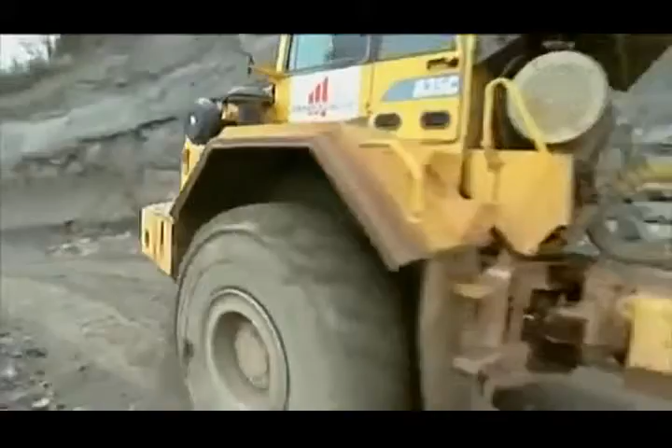The team attempting to build this amazing freeway in the sky had to survive landslides, fight winds gusting at 130 kilometers an hour, and weather massive storms as the bridge simply hung in the balance. It's a bridge that pushes the boundaries of engineering to the limits, and then beyond.

Imagine building a series of Eiffel Towers, then slinging a 4-lane highway between them, all the way across one of the deepest valleys in France. Impossible though it sounds, that pretty much describes the building of the Millau Viaduct.

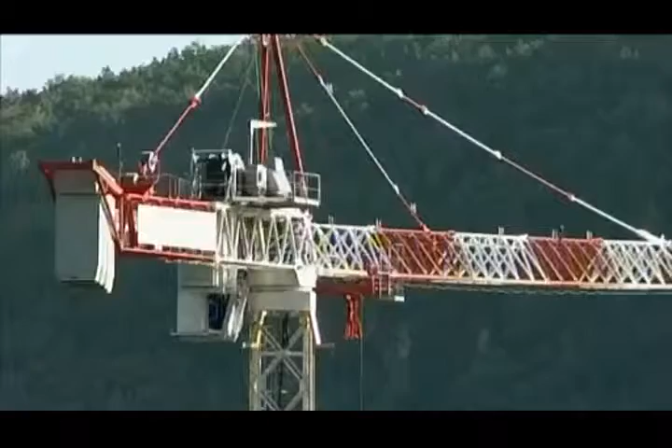From the start, the construction team faced 3 daunting challenges. 1. Build the tallest bridge piers in the world. 2. Put a 36,000-ton freeway on top of them. And 3. Erect 7 steel pylons, each weighing 700 tons.

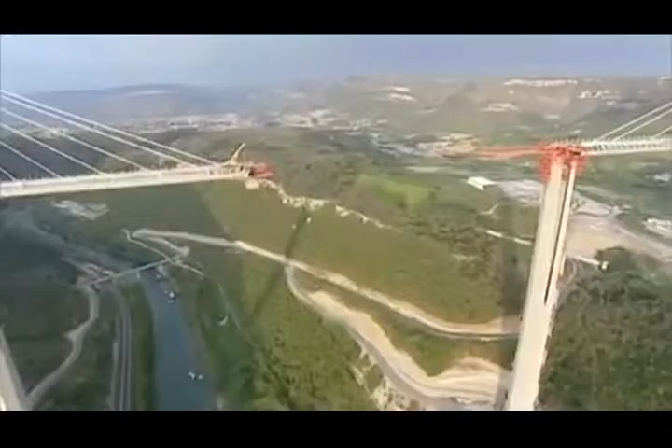And what's more, they had to do this hundreds of meters above solid ground. So high that if you're on the 86th floor observatory of the Empire State Building, you'd still be looking up at this amazing bridge.

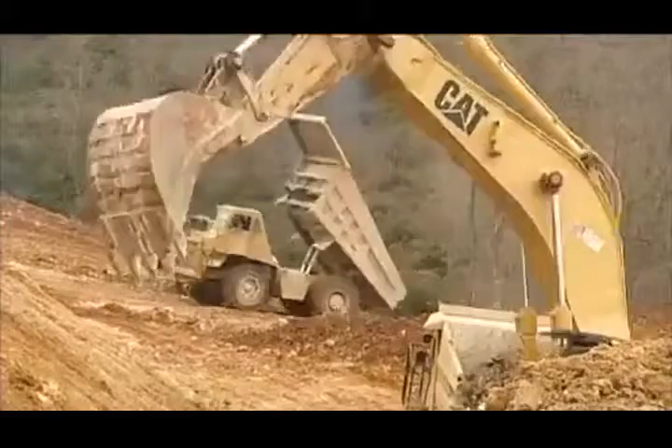October 2001, the team break ground. They're required to build a bridge that will last for 120 years. And to win the contract, the teams promised to build it in record time, less than 4 years. To up the ante, any delay will cost them $30,000 a day in penalties.

There are 7 piers that are numbered from the northern end of the valley. Number 1 will pose problems because of the steep slope. Number 2 will be the biggest challenge since it's the tallest. Crossing the river, number 3 is not much shorter. Then 4, 5, 6 and 7 find the gentler slope to the south.

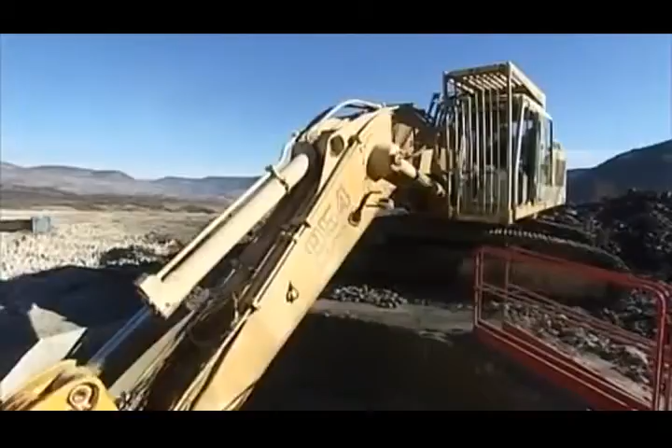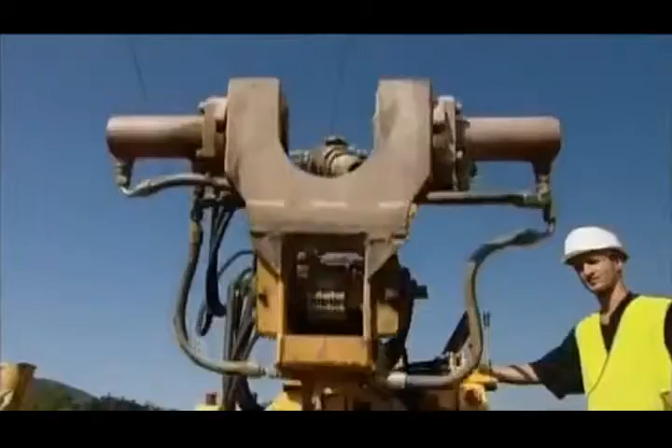To begin, the team had to bury the foundations deep in the bedrock in order to support the enormous weight the bridge will place on them. But the forces of nature were stacked against them. Geologists have warned of the risks posed by the region's fractured limestone. The rock is full of cavities, cavities that are essential to the local cheese economy.

These cave systems, close to Millau, are home to a unique bacteria responsible for the blue mold in the world-famous Roquefort cheese. But what's perfect for cheese could be disastrous for a megastructure. The geologist's diagnosis spelt one thing: landslides. This kind of catastrophe could jeopardize the entire project. Despite the warnings, building went ahead as planned.

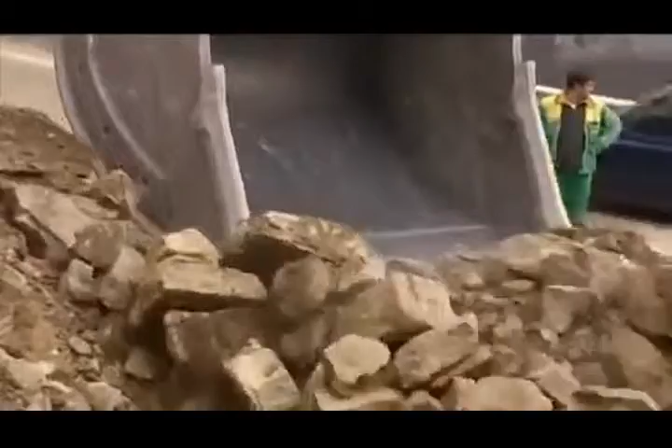Then, well into construction, as predicted, a dramatic storm causes a landslide. 4,000 cubic meters of rock collapse around Pier 1. Fortunately, the fallen rock doesn't damage the pier, but the warning is clear. They're forced to divert precious manpower and equipment to stabilize the slope and prevent a repeat collapse.

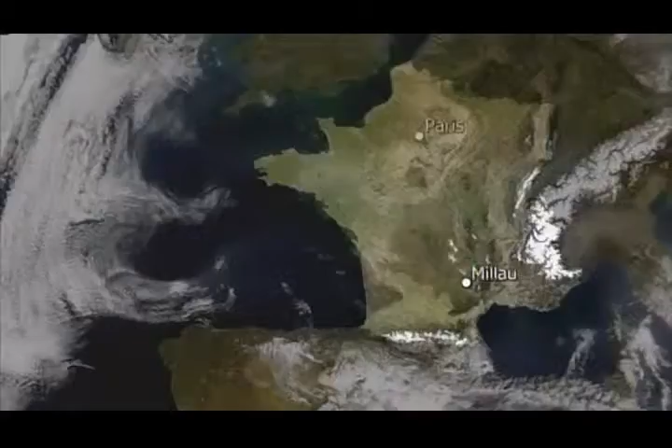So if the area is prone to landslides, why did they build the world's tallest bridge here in the first place? The answer is simple. In the 1980s, France built a freeway linking Paris directly with Spain. This major artery headed south across the French countryside, while from the Mediterranean, the freeway headed north, until they both hit one of the deepest valleys in France and stopped dead.

Welcome to Millau, France's least favorite bottleneck. The town of Millau is in the mountainous region of the Massif Central, one of the most tranquil parts of France. But in summer, this poor medieval town suffered traffic hell. The locals couldn't take it anymore. Neither could their mayor.

It was terrible for our reputation. When you hear every day on the television and radio, avoid Millau, there's a traffic backup, a 5-hour wait in Millau. It's clear the bridge was needed. But it took the French government a very long time to get round to building it.

12 years before construction began, up in Paris, the Ministry of Transport first came up with a plan. Their head bridge builder, Michel Virlogeux, is no ordinary engineer. He's a man who thinks big, very big. Like the Normandy Bridge in northern France, the longest cable-stayed span in the world. With this record-breaking structure completed, Virlogeux was on to his next, Millau.

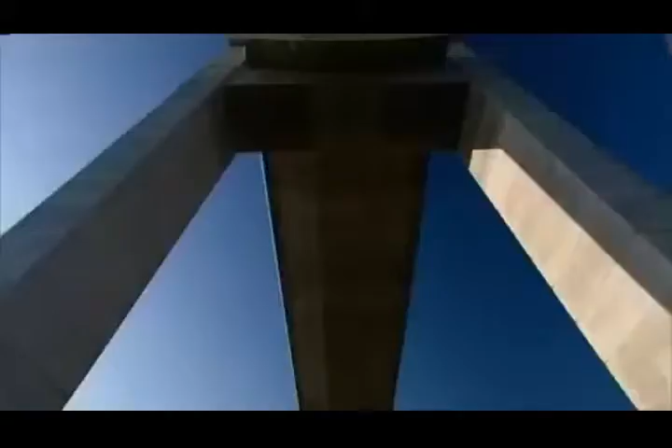His plan, another cable-stayed bridge, but pushing the technology beyond anything previously attempted, with piers 4 times higher than the Normandy Bridge.

France's Millau Bridge would not only be the world's tallest, it would be unlike any bridge ever constructed. When I first showed the drawing of this bridge to the authorities, they really thought I was crazy. Virlogeux's Normandy Bridge has 2 sets of cables supporting the deck. But he wanted to up the stakes for Millau by losing 1 row of cables, so the remaining line would be forced to do twice the work.

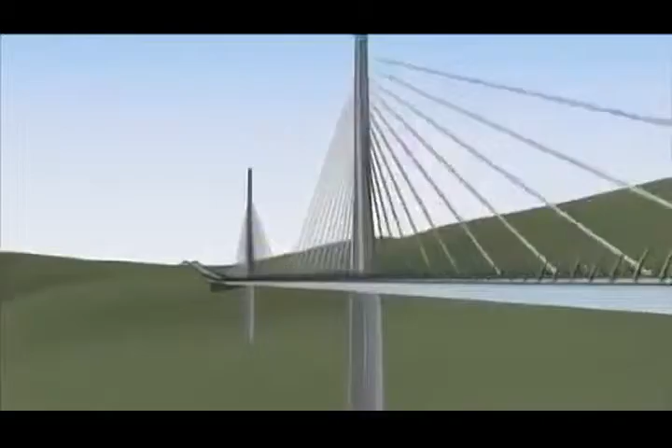More dramatically, the 2.5-kilometer Millau Bridge, instead of having a single main span, needed a whole series of piers to support it across the valley. No one had ever attempted a multiple-span, single-line cable-stay bridge on this scale before.

The French authorities had a problem. Nervous about Virlogeux's groundbreaking scheme, they held a competition inviting other engineers and architects to compete with different designs. The winner, Lord Norman Foster, is one of the world's superstar architects. In Hong Kong, he built the world's largest airport terminal. In Barcelona, offices literally hang from a mast on his communications tower. This is a man who regularly contemplates the impossible and delivers.

You know, it's the challenges. And it's one challenge on top of another, on top of another. And with Millau, one of the biggest challenges was making it fit into the landscape, given it's just down the road from the famous Gorges du Tarn, France's equivalent of the Grand Canyon. How do you make something which has to be so immensely strong against the forces of nature look very gentle, very delicate? How do you weave something on that scale into the most unbelievable landscape?

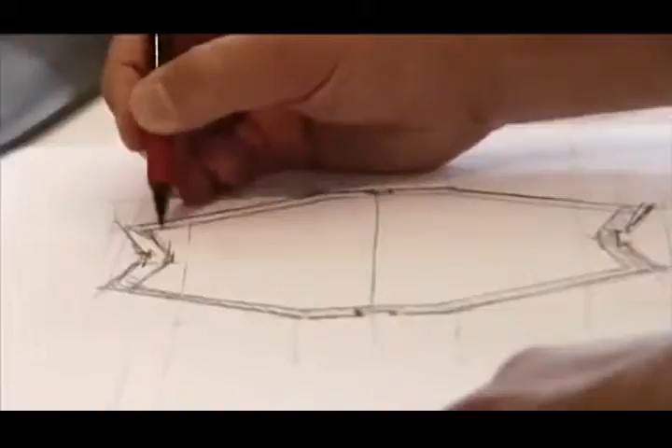Ironically, Foster's answer was to take Virlogeux's pioneering scheme, then push it 1 stage further. He turned an elegant piece of engineering into a delicate work of art by boldly cutting out 2 of the 9 original piers and seriously slimming down the remaining piers and road deck. Foster wanted the bridge to appear as delicate as a butterfly. But this butterfly has to support the weight of 5 Eiffel Towers in gale-force winds hundreds of meters above the River Tarn.

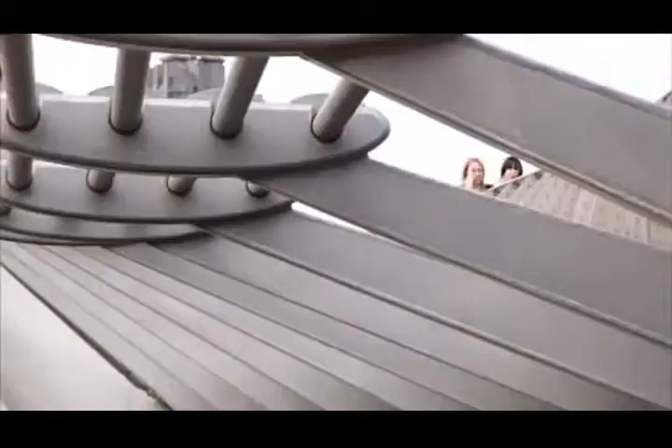Then, with Millau still on the drawing board, Foster's record as a bridge builder suffered a major setback. His Millennium Bridge in London is actually another record-breaking structure, the lowest profile suspension bridge in the world. But when this footbridge opened to the public in June 2000, it was a public relations disaster.

Crowds walking over it set up a resonant frequency, and the bridge began to sway. As people adjusted their step to the small initial wobble, the effect was magnified. Though it didn't threaten the structure, the swinging motion became so dramatic, the authorities closed the bridge for a refit that took 1.5 years and ended up costing over $8 million. It was a bad omen for the Millau Bridge, where construction was soon to begin. And at 15 times the height, a design flaw would be a catastrophe.

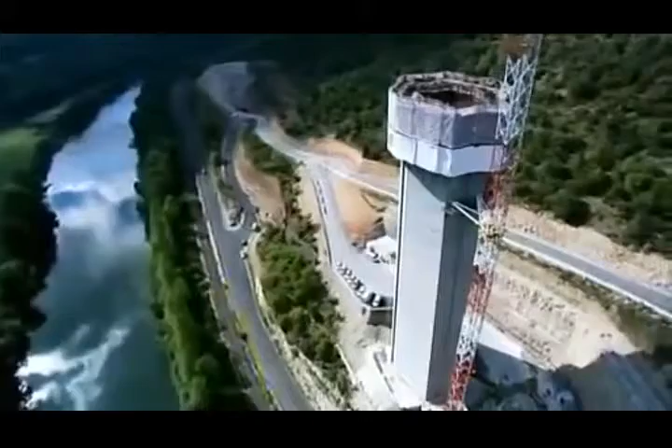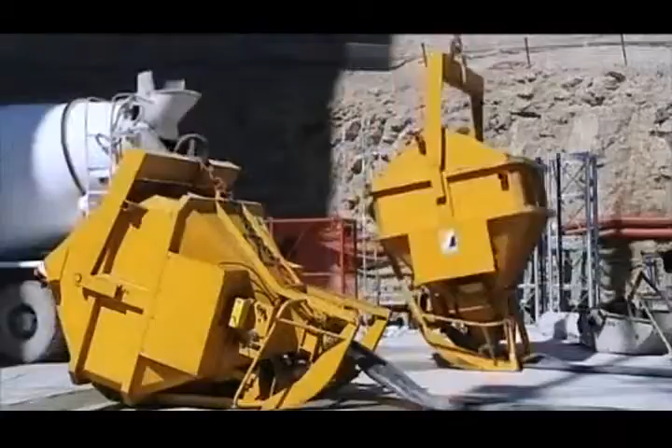December 2001, France's Millau Viaduct, the tallest bridge in the world, is under construction. Everything about this project is supersized. It'll need 200,000 tons of concrete, so much that the team have to build a concrete factory on site. But there's nothing straightforward about this concrete. The formula must be just right. It needs structural strength to support the massive loads it'll have to bear. But it can't set too quickly, as it has to be hoisted into position and poured hundreds of meters in the air. And it needs to be just the right color to suit Norman Foster's vision.

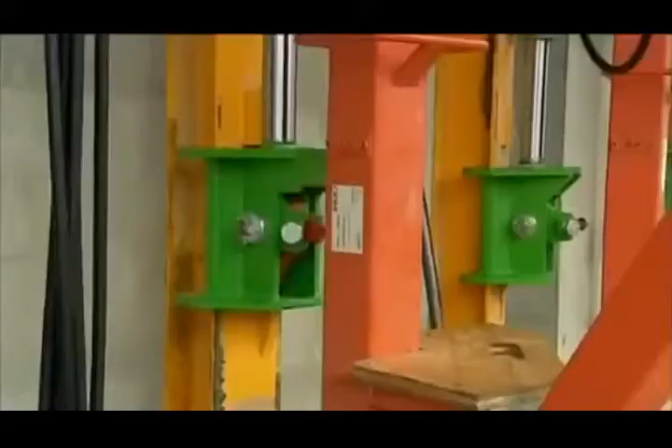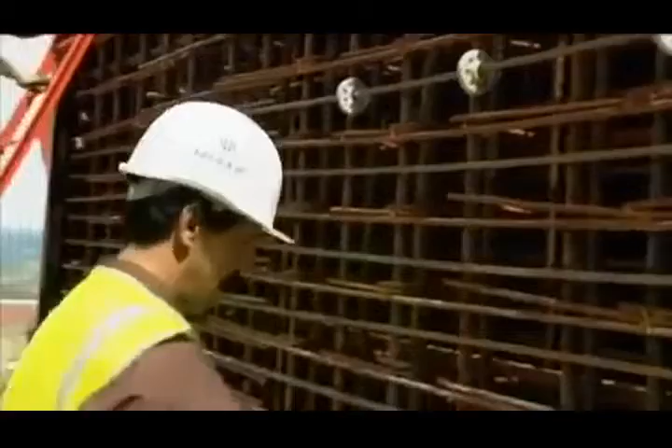In fact, the architect's vision has created a headache for the construction team. He's designed each pier as a complicated geometric shape, tapering the entire way up with vertical grooves set into them to create shadows. But what's just a line on paper for the architect was a major challenge to build. The enormous piers are built step by step by pouring concrete into a temporary mold. To give the required strength, the molds are filled with a frame of steel reinforcing bars. In total, 16,000 tons of these steel bars are hoisted into place and secured. Laid end to end, they'd stretch the 4,000 kilometers from Millau all the way to Central Africa.

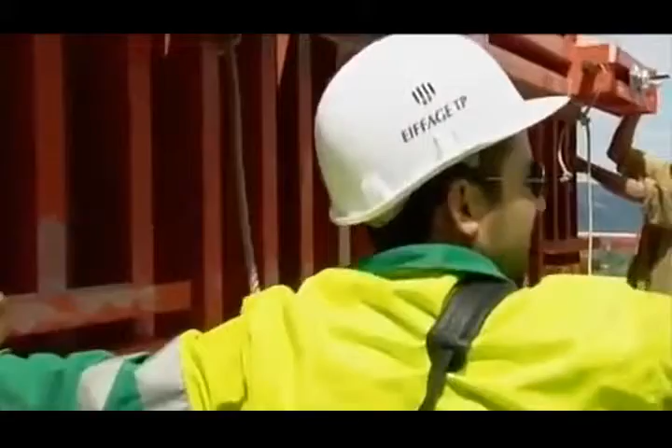The shape of each pier is seriously complicated. As a result, each time they remove the sections of red steel shuttering, they have to change the shape of the mold to fit the profile of the next 4-meter section. Manhandling these steel panels weighing up to 15 tons apiece is no picnic. And with the combined height of the 7 piers totaling well over 1 kilometer, they have to change the shape of the mold over 250 times.

Every 3 days, each team on each pier went through this whole cycle. Then they repeated the process. But it was a race against time, with a permanent threat of delay. Keeping the entire build on time and to budget was the daunting responsibility of one man, Jean-Pierre Martin.

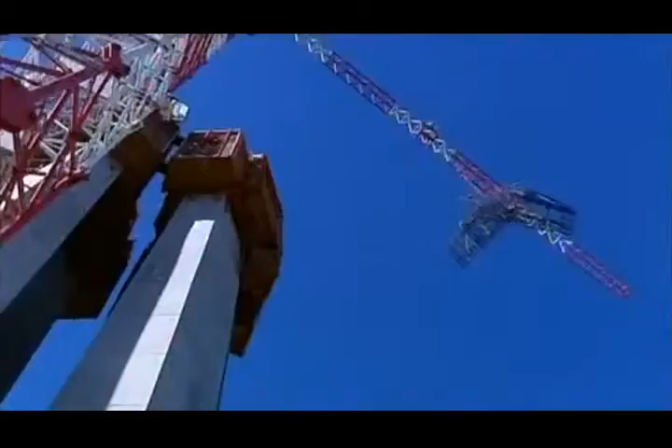If instead of 3 days we took 4, imagine that multiplied by the number of castings. We'd end up with a 3 or 6 month delay. With a penalty of nearly $1 million a month, this isn't something Martin wanted to contemplate. And this schedule wasn't his only headache.

You have to be pinpoint accurate when you're building the tallest bridge piers in the world. Get it wrong, and the bridge simply won't fit together. Just 10 centimeters out, about a hand's width on each 4-meter section, and the tallest pier could be 6 meters off at the top.

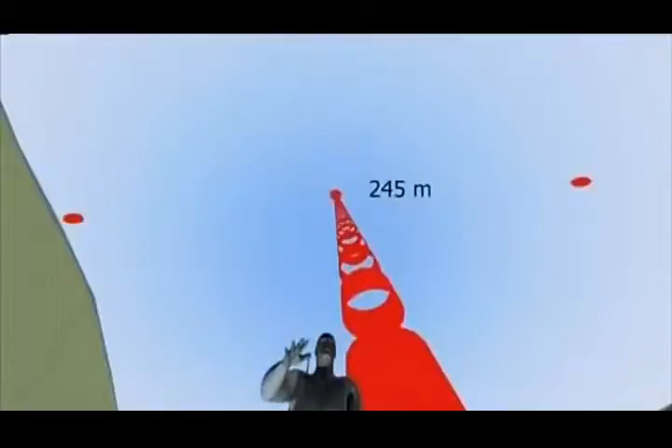Each team was aiming for a specific point in the sky. For Pier 2, this was exactly 245 meters above the ground, 546 meters from the north side, and 1,914 meters from the southern end. There was no room for error.

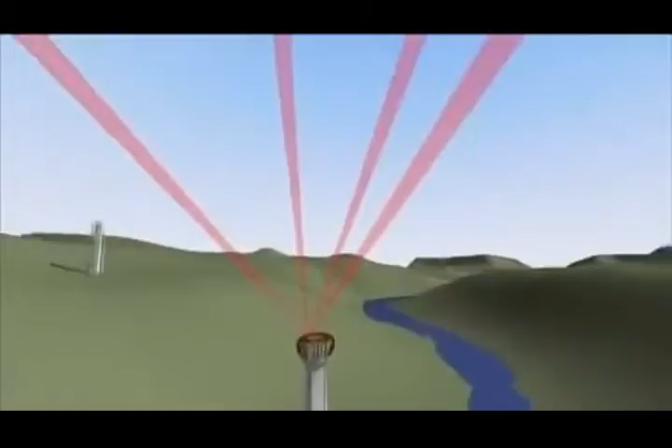The only chance they had to get it right was with GPS, accurate to within 4 millimeters. Using signals from multiple satellites, the team could pinpoint their position and make sure they're on target for that critical point in the sky they needed to hit.

Month after month, the piers climbed higher. Finally, by November 2003, they reached their full height. At 245 meters, Pier 2 becomes the highest bridge pier in the world. But is this record-breaking pillar where it's supposed to be? Amazingly, it's dead on target to within 2 centimeters.

Champagne corks pop. It's time for a major celebration. Against all the odds, they were 1 month ahead of schedule, but the team couldn't afford to relax. The next stage of the project would be the most difficult part of the build.

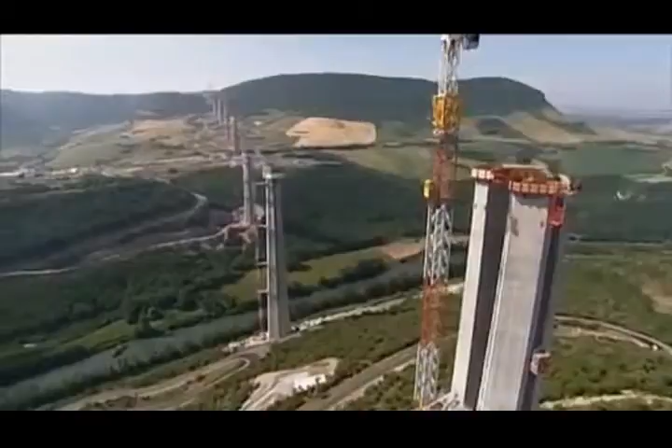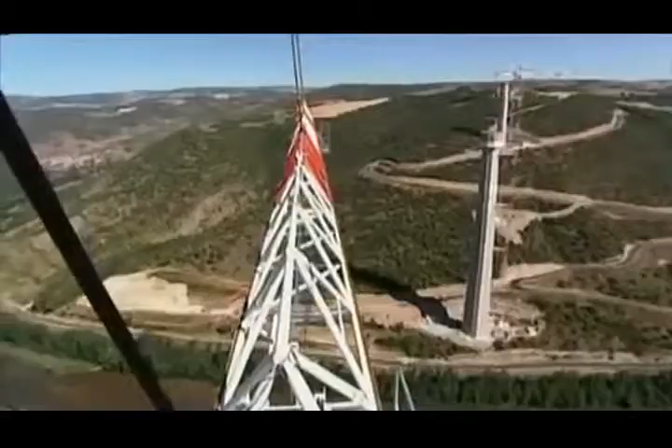Phase 2 of building the world's tallest bridge involved putting a 2.5-kilometer roadway weighing 36,000 tons on top of the piers, a full 270 meters above the River Tarn. Bridge builders know danger comes with the territory, but working at these heights can be lethal.

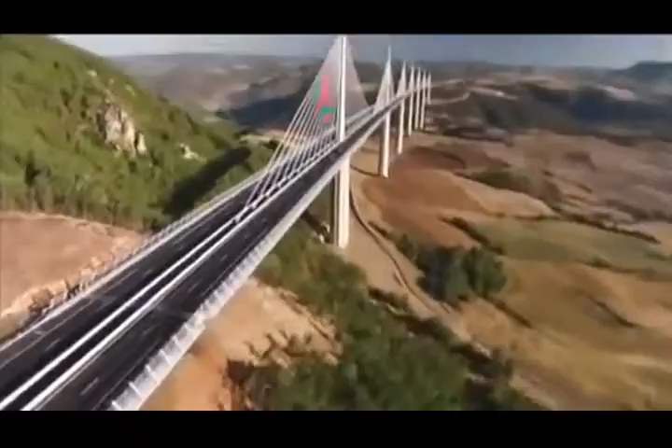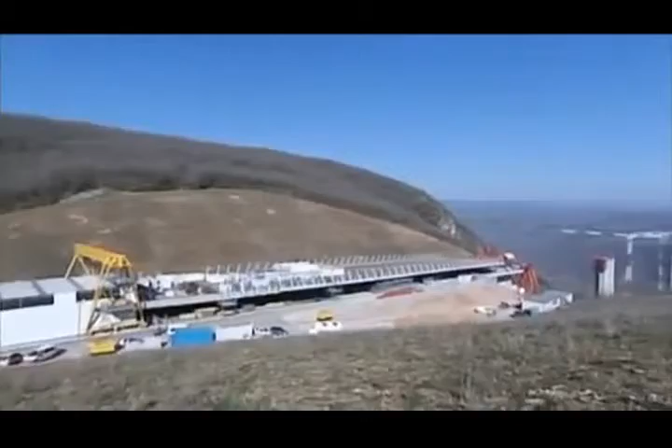With these fatalities in mind, the team decided to fabricate the entire road deck on the safety of solid ground. This meant building it in steel, which in theory would be much safer than lifting vast concrete sections hundreds of meters into position. There's only one problem with this plan. No one had ever put a road deck on piers anything like this height before, let alone over a 2.5-kilometer span.

In the end, only one steel manufacturer had the courage to take on this colossal challenge. Eiffel, the steel firm set up by the great French engineer. Eiffel built what was once the tallest bridge in the world, the Garabit Viaduct in southern France, before getting round to the framing for New York's Statue of Liberty and, of course, his signature tower in Paris. But despite the company's experience, Eiffel's director, Marc Buonomo, knew he was taking a serious risk.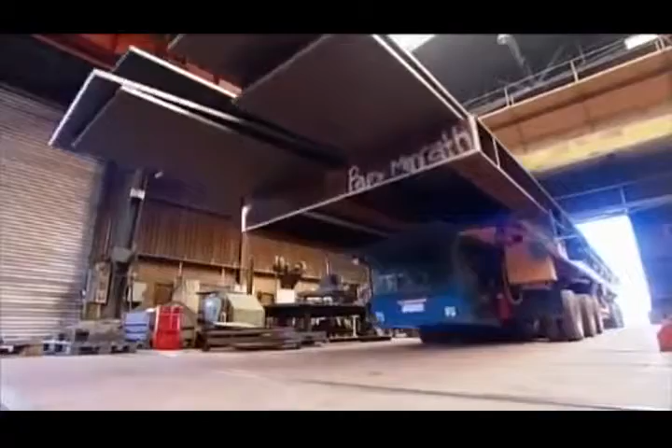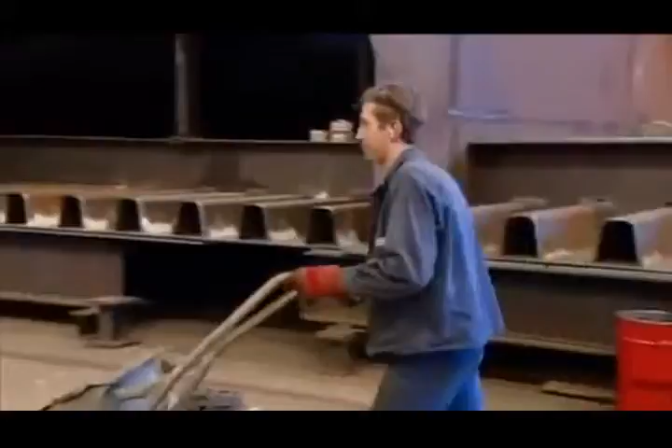It was a gamble for the company, because if there had been a mistake, if it hadn't worked, it would have been the whole company. They fabricated the massive sections that would make up the road deck in the company's steel factories. This immense jigsaw puzzle involved manufacturing 2,200 separate sections, weighing up to 90 tons, and some of them 22 meters long.

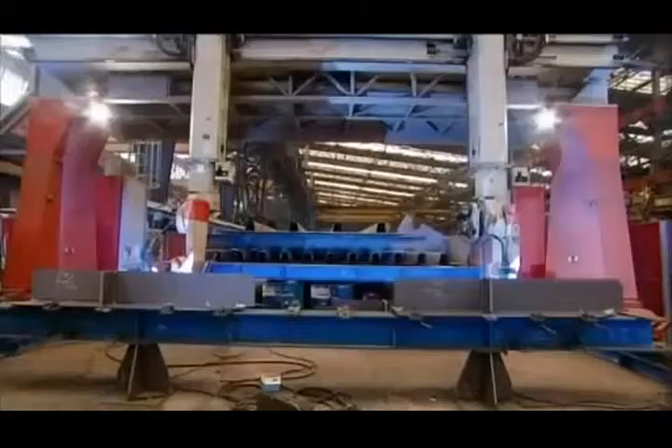Each cutting pattern or template is programmed into the computer. Then the machine automatically blazes its way through the steel. The torch reaches a scorching 28,000 degrees centigrade. That's 5 times the temperature of the Earth's inner core.

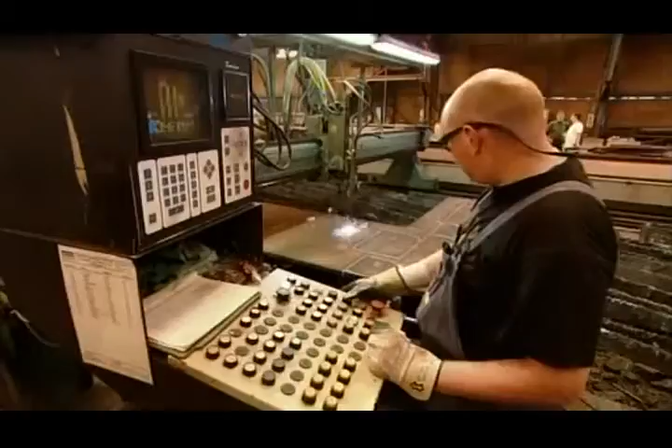But cutting and welding was the easy part. The hard part was getting these monster sections the hundreds of kilometers from the factories to Millau. The routes had to be planned with precision to avoid major damage. The police coordinated safety and clearances.

Even with that level of preparation, some obstacles felt as if they're cutting it just too close for comfort. And this was no one-off event. To build the viaduct took over 2,000 of these extraordinary road convoys.

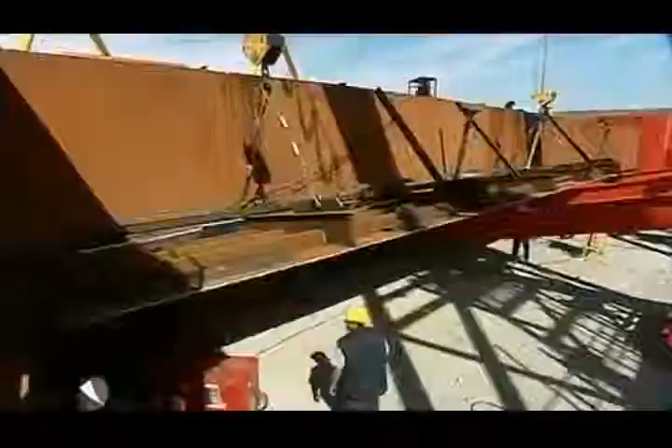The components arrived at assembly plants set up, one on either side of the valley. Here, the pieces of the massive jigsaw puzzle were welded together to form the two halves of the deck. But getting these two halves to span the valley on top of the world's tallest bridge piers would be a major challenge. They'd be the first team to put a road deck on a pier taller than an 80-story skyscraper.

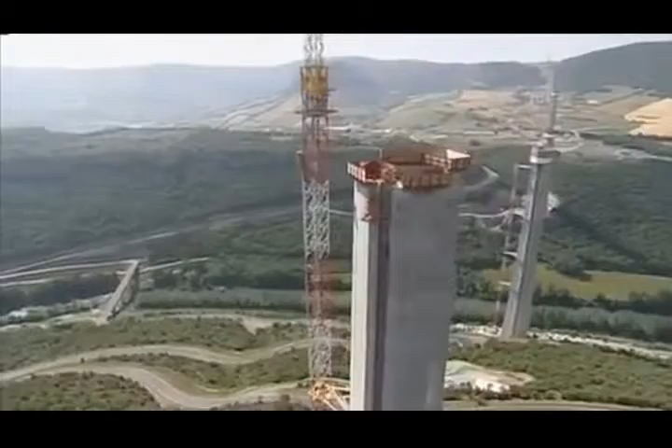And pushing bridge building beyond anything attempted before, they planned to slide the entire 2.5-kilometer road deck over in two colossal pieces. The bridge's chief engineer, Jean-Marie Cremer, was one of the few people who believed it could be done. All the engineers who know this method, who were in the know, didn't believe it was possible. If the team had got their calculations wrong, the entire structure could collapse into the valley.

We found a solution for the construction, which was to launch the bridge from the two sides. One part on the Larzac Plateau, one on the Rouge Plateau. And to push them from the two sides and to make them come and meet here above the River Tarn. Smaller bridges use a similar technique. A powerful set of hydraulic rams literally pumps the deck from one side to the other.

But Millau would be the longest launch ever attempted over the highest piers in the world, and the results could spell disaster. The deck is so slender it would bend and collapse if it were pushed out over the 342-meter spans between each pier. The furthest anyone's previously managed is less than half that distance.

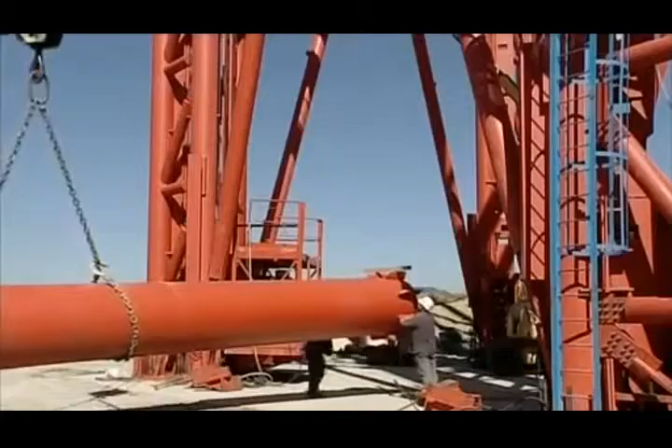The first part of the solution was simple. Fit a pylon so its cables support the front of the deck as it goes out over the valley. Then construct temporary steel support towers that halve the spans to a more manageable 171 meters. These steel towers were a construction feat in themselves. The largest, over 170 meters high, is the tallest ever built, and they needed to carry a massive load. 7,000 tons as the leading edge of the deck, together with the first 90-meter pylon, slide over.

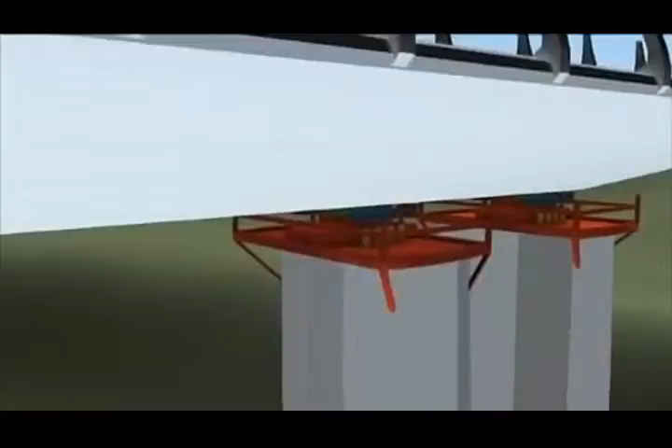Simply pushing this enormous weight over the top of the vulnerable piers would bring them crashing to the ground. If we'd done a conventional launch, we would have knocked the piers over like the pins in a bowling alley. So two of the team reinvent the way this type of bridge is built. Marc Buonamo with Jean-Marie Cremer. The trick is to use a series of these launching systems to jack up the deck and inch it forward.

Each system uses two wedge-shaped blocks under each side of the deck. The upper wedge is pulled forward by a hydraulic ram. It slides up the slope of the lower wedge at the same time, lifting the deck from its supports and advancing it 600 millimeters. The lower wedge then retracts, dropping the deck onto its supports. The upper wedge returns to its original position, and the whole cycle begins again.

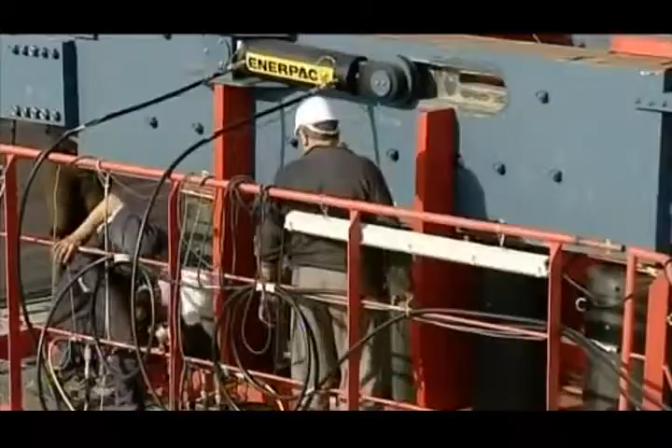4 of these clever devices are placed on each pier, all programmed to work at exactly the same time. The result is that together, they pick up the entire roadway and shunt it forward. But if one fails or gets out of step, it could spell disaster. The force could push the bridge piers apart till they collapse. When you're up there and you see Millau 300 meters below you, you ask yourself, was this a good idea? The future of the entire project was now hanging on a prototype, and it had never been tested.

It's the morning of February 26, 2003. Do or die day for the world's tallest bridge. Everything is about to be put to the test. The flexibility of the deck, the strength of the temporary piers, and critically, the pioneering hydraulic ram system. Even Buonomo, the man in charge of the launch, had his doubts. As it had never been done before, I have to tell you, I had fears that it wouldn't work.

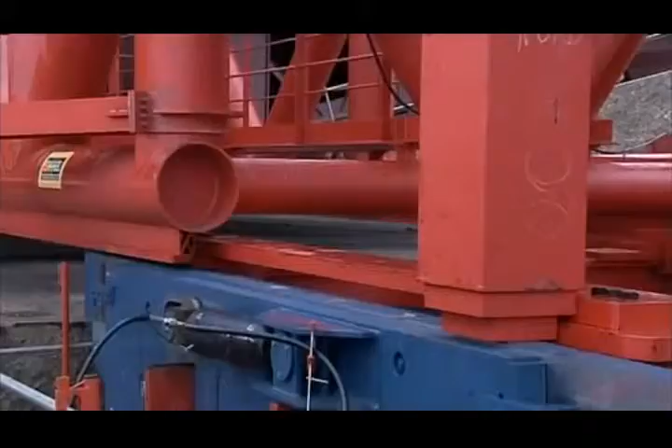The pumps kick in, the pistons start to push, and the deck begins its huge journey across the valley. The moment I heard the motors start, I put my finger on the deck, and I could feel my finger move. Every 4 minutes, the deck advanced 600 millimeters across the valley. Surveyors tracked its progress. But it was still a nail-biting time as they watched the unsupported deck crossing the void.

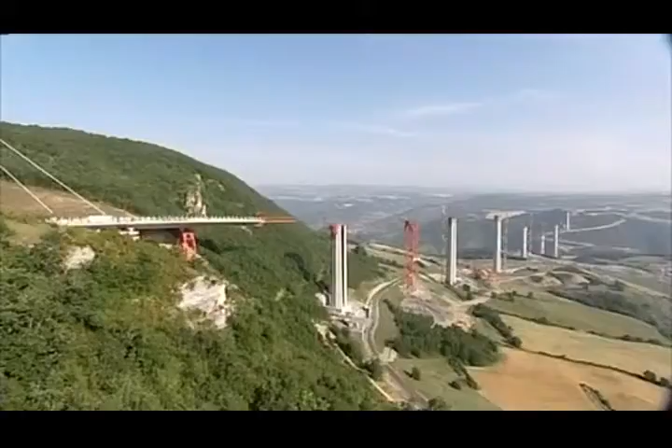Eventually, the deck reached the safety of the first pier. 204 meters down, only 2,256 to go. The launching system seemed to be working as planned. The engineers were feeling optimistic. But as the deck advances into space, it'll become more vulnerable to the wind, which can reach 130 kilometers an hour. Unfortunately, the road deck has the shape of an upside-down airplane wing, and the team's greatest fear is that this wing could simply take off.

The engineers kept a close eye on the wind and weather conditions. When they were satisfied there was a 3-day weather window and the wind wouldn't exceed 85 kilometers an hour, they'd give the construction team the go-ahead, and the deck launch could continue. The reason for this precaution is simple. Strong winds can literally tear a bridge apart.

In 1940, Washington State built a suspension bridge across the Tacoma Narrows in the US Northwest. It opened with a grand ceremony on July the 1st. But the celebrations were short-lived. The bridge had a major problem: the wind. Girders beneath the deck, designed to make the bridge rigid, actually blocked the wind, causing the roadway to ripple alarmingly. Locals soon dubbed it Galloping Gertie.

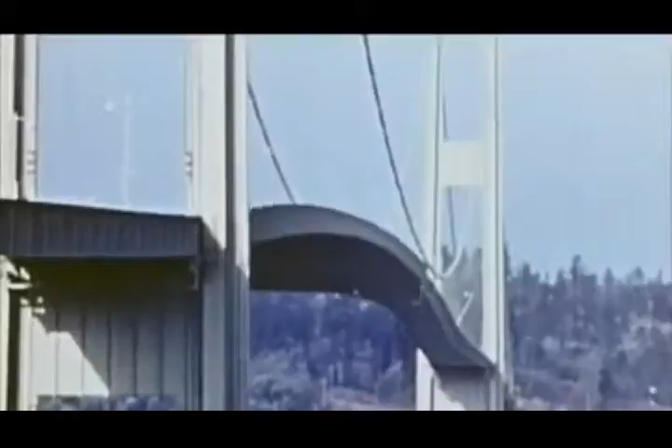On the 7th of November, with the wind less than 70 kilometers an hour, the bridge begins to twist violently. At 11 a.m., time runs out for Galloping Gertie. The wind sends the bridge crashing into the river. Wind tunnel testing is now standard procedure as a direct result of Galloping Gertie.

For the Millau Bridge, they analyzed the wind in the Tarn Valley over 18 months, then recreated those conditions in the wind tunnel. Wind engineer Olivier Flamand was shocked by the results. The average wind speed was relatively low, but because there's such strong turbulence, it created very fast peak winds. The rugged terrain creates serious turbulence at the height of the road deck. Winds peak at 130 kilometers per hour. That's hurricane force.

They tested every aspect of the bridge to analyze the risks: piers, pylons, and critically the deck. But it's not just the aerodynamics of the finished bridge. They needed to find out how it would behave when it was most at risk, during the launching of the deck. Olivier and his team reached a chilling conclusion. The winds they've measured are strong enough to blow the unsecured deck off its supports and send it crashing hundreds of feet to the valley floor.

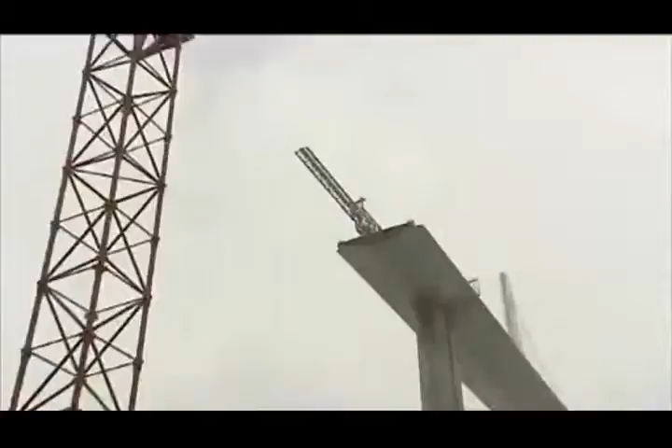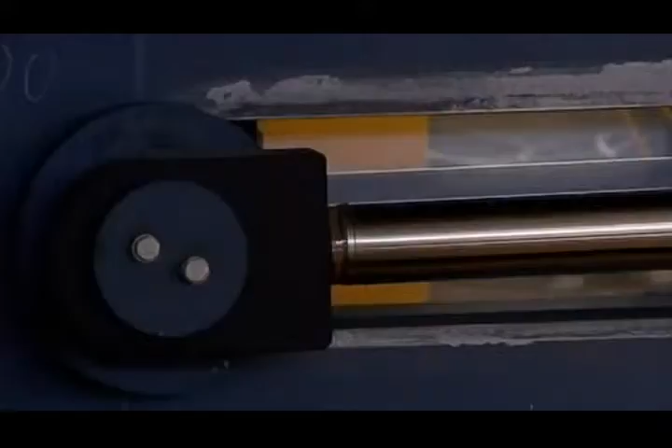And then the nightmare began. On the 22nd of August 2003, 6 months into the deck launch, one of the launch systems failed, leaving the deck hanging in the wind. To make matters worse, the weathermen were predicting storms. So far, these massive pumping machines had worked perfectly. But the fact is they were prototypes, and due to the frantic schedule, they'd never been tested.

The problem was that the non-stick Teflon between the sliding surfaces had ripped, and the friction generated was too much for the hydraulic rams to push against. Unfortunately, no one had planned on replacing parts of this monster machine mid-launch on the top of a massive concrete pillar. This was very bad news for the man who staked his reputation on this system. It was maximum stress, like poison in your mouth. You don't forget that.

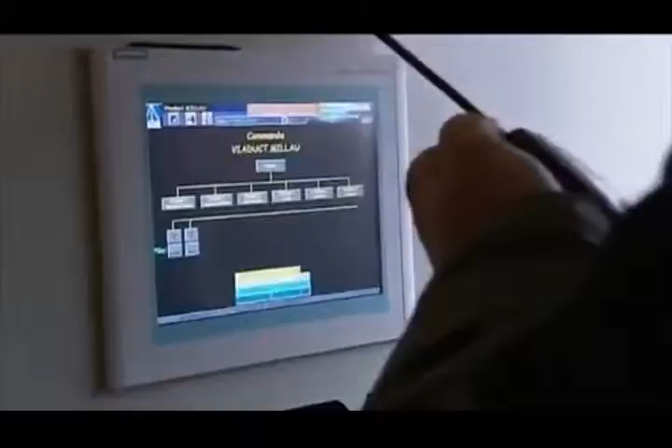Re-examining their calculations, they realized the cause of the problem. They'd underestimated the forces between sliding surfaces, but they wouldn't be able to repair it without the necessary spare parts. The clock was ticking, and Marc Buonanno needed a solution fast. When Apollo 13 came back with that incident, the NASA engineers requested they did the inventory of everything there was on board to know how to fix it.

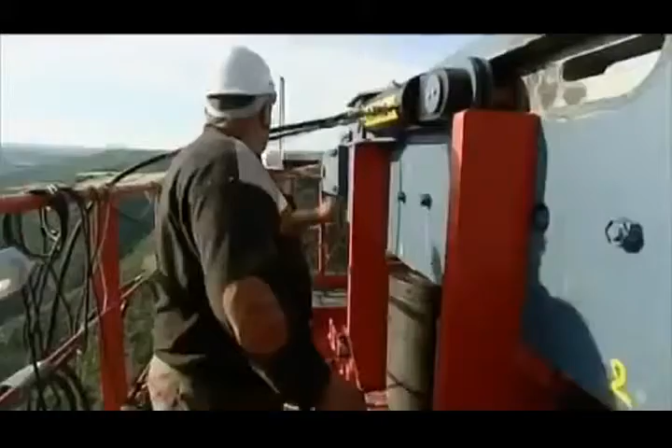The Millau team did an inventory. They realized that the other launching machines, not yet being used, could be stripped to provide the new Teflon surfaces they needed. Working all through the night, the team extended the access platform. This allowed them to take out the 5-meter-long, 2-ton steel wedges, replace the Teflon, and reassemble the launching machine. By 8 a.m. the next morning, it was ready to resume the launch.

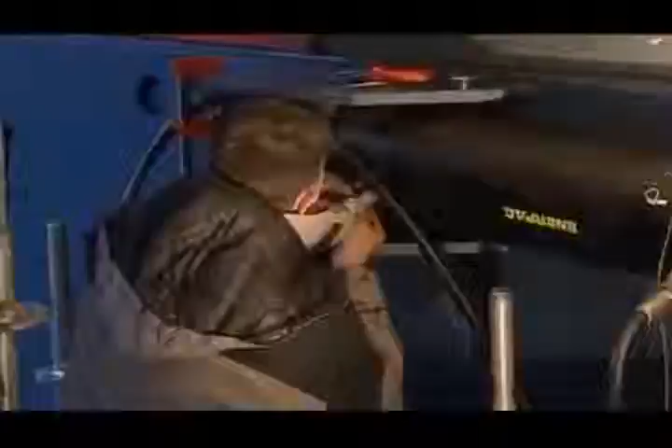The rest of the week, the predicted storms arrived, and another set of launching machines wore out. So when the deck finally made it to the safety of the next pier, the team breathed a major sigh of relief. You don't forget that. I won't forget that for 4 hours I was really scared. The two decks continued their journey across the valley. Day after day, week after week for a full 14 months, they approached each other, millimeter by millimeter.

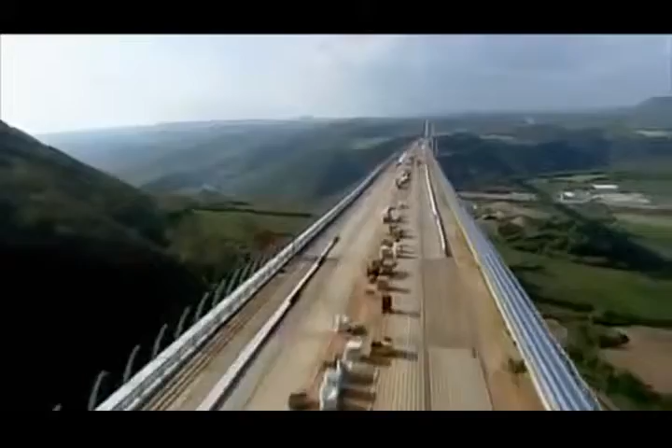By May 2004, they'd reached a critical phase. From the northern end, the shorter deck had traveled 717 meters into space to reach its final resting place. From the south, the longer deck extended over 1.5 kilometers. Only the section over the river, the one point where it was impossible to erect a temporary pier, divided them. But would they meet as planned? If they've got their calculations wrong, they'll have built the biggest white elephant in Europe.

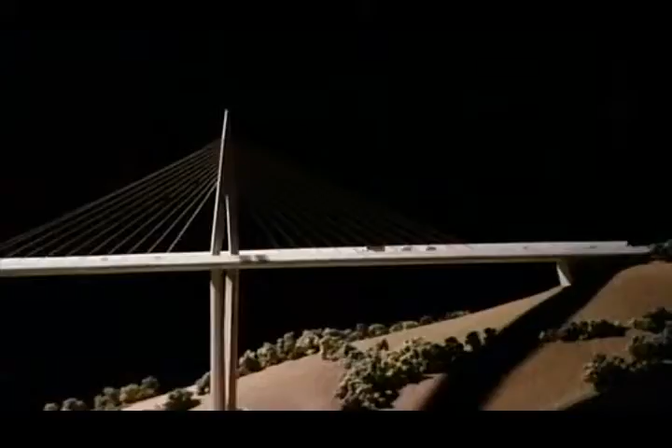Even the man behind the whole project had his doubts. I was not convinced at all that the two parts of the deck could meet exactly with a perfect geometry. The odds were against them. Calculating such a feat so precisely is a Herculean task. Firstly, the two starting points on the northern and southern slopes of the valley are at different heights. Secondly, the bridge has a subtle curve to it.

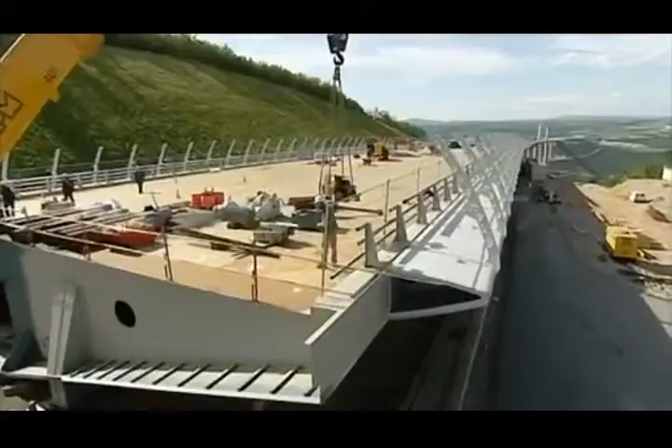As a result, each steel panel which makes up the road deck had to be cut and welded with extreme precision. It would be an engineering triumph if they got these two sloping curved decks to meet as required. The team checked the weather reports. With the wind inside safety limits, they gave the go-ahead for the final push.

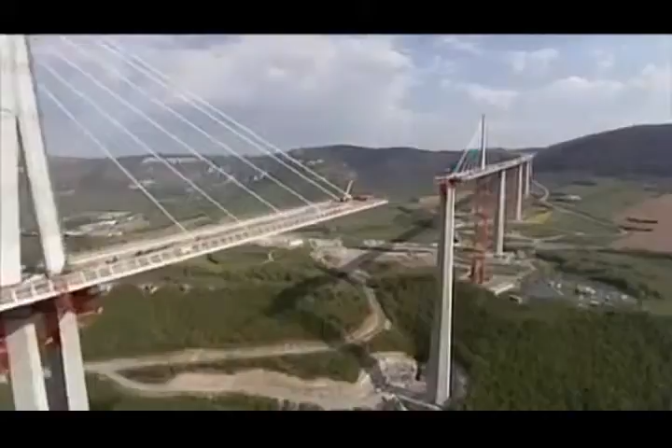The rams began to drive the deck's leading edge off the safety of Pier 3 towards its destination. At this point, a total of 21 launching systems needed to move at exactly the same moment to avoid disaster. If anything were to go wrong now, the man responsible would be Marc Buonanno. Everyone asked me, how can you be sure that it will go straight? So to be sure that they were going to the right place, I had a GPS put on the front, so I could see the gap between the theoretical and the real position.

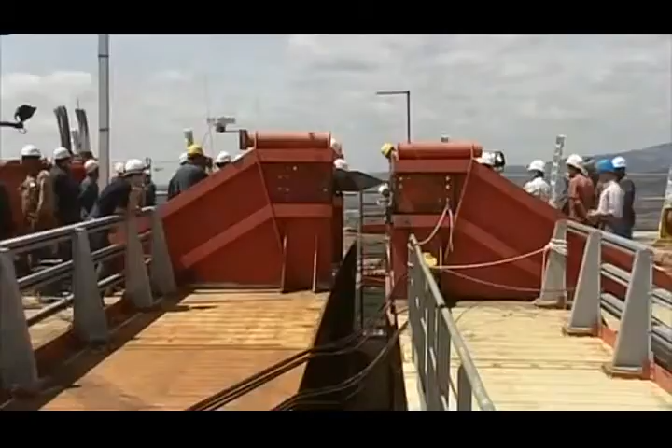Over the next 2 days and nights, the deck advances 600 millimeters at a time towards its final resting place. The world's media are watching the critical meeting of the decks, and to add to the pressure, the French Prime Minister is due to drop in to celebrate the event. The deck pushes forward. Now, with only centimeters separating the two sections, a magnum of champagne is hung between them to mark the moment.

At last, union. The two massive steel decks have traveled high over this valley, a total of 2.5 kilometers, and when they check, they're aligned to within 1 centimeter. That's accurate to within 99.9999%. All the measuring, all the calculations have paid off. They've nailed it.

The meeting of the decks was a special moment. News reports traveled round the world, and in Salzburg, Austria, they reached Felix Baumgartner, aka Felix the Conqueror. Felix has made a career base jumping from some of the tallest structures on the planet, and within 24 hours he'd driven to Millau and was calculating the logistics for the jump, factoring in his two main aims, to avoid arrest and death.

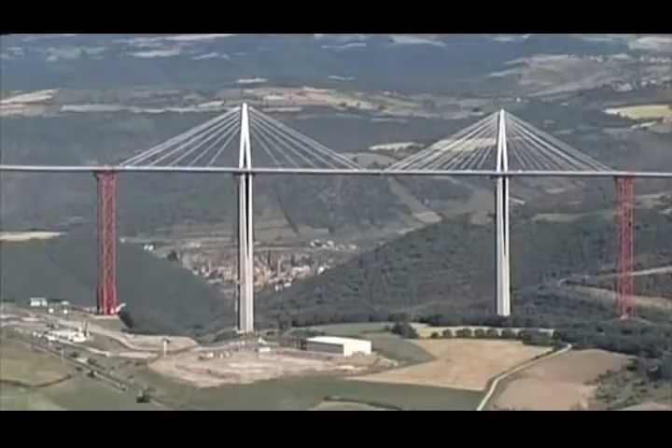Baumgartner waited for darkness before arriving on site. He found his way to the base of Pier 2, then climbed an access ladder the full 245 meters to the top. He entered the steel road deck and found a place to hide until daybreak. He had to remain concealed until the sun was high enough for his cameramen to record his world record attempt.

At 7 a.m., Felix the Conqueror emerged. He took a cool backward flip off the tallest bridge in the world and entered the record books. The tallest bridge in the world, 250 meters. I did it. And having evaded death, he made sure he's not caught by the police.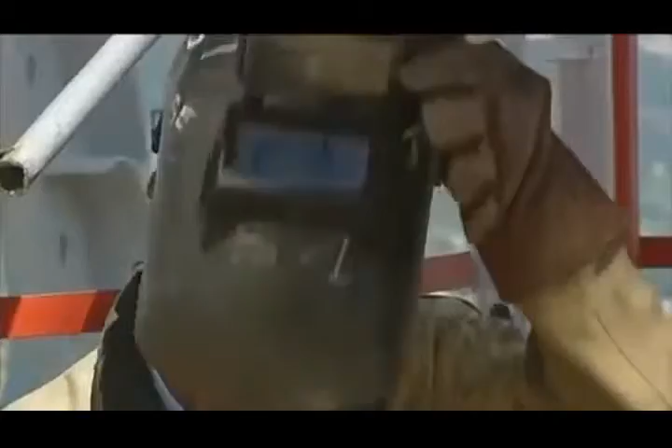The decks have been joined, and the team have reached the final phase of the project. But there was still a race to meet the schedule, and their problems weren't over yet. Everyone could see the dramatic undulations in the flexible steel deck. Even some hardened bridge builders wondered about its structural integrity. It was a huge surprise for everyone. All the engineers said, we knew steel was flexible, but not that flexible.

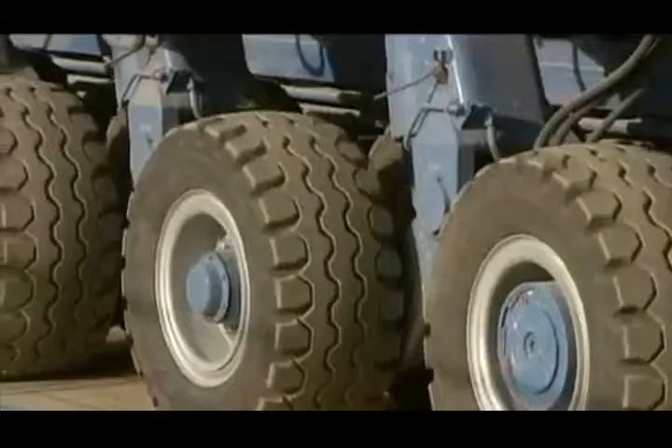The team were relying on the pylons and cables to pull the deck straight. Each massive pylon is 90 meters high and weighs 700 tons. Placing them in position on the slender deck, high above the valley floor, would go beyond anything ever attempted. Once again, Marc Buonomo had a plan. You know, the first people to make vertical pylons were the Egyptians. Buonomo adapted a technique used in ancient Egypt to erect obelisks in the sands.

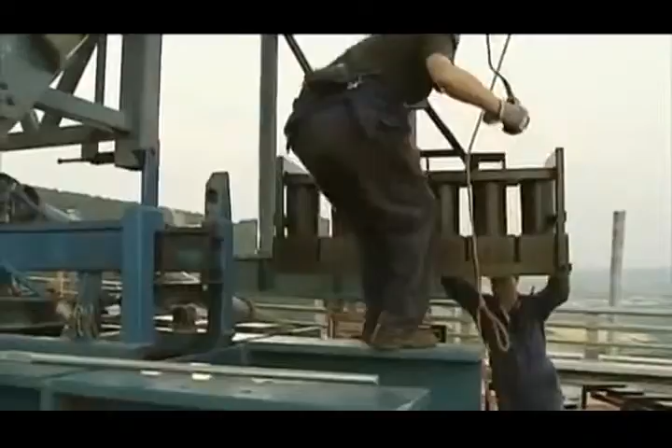On top of the road deck, the team put up two enormous steel towers, both of them secured by cables and equipped with a hydraulic system capable of raising 1,000 tons. The 700-ton pylon is then lifted by the hydraulics. As it rises, it pivots little by little until it's vertical. It's then lowered safely onto its anchorage point. Buonomo's 4,000-year-old technique worked to perfection.

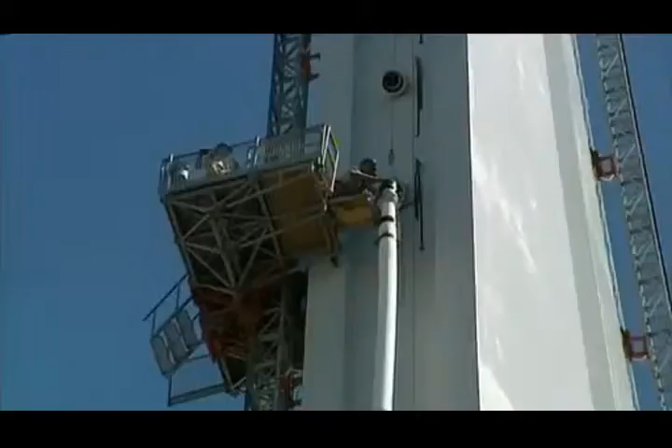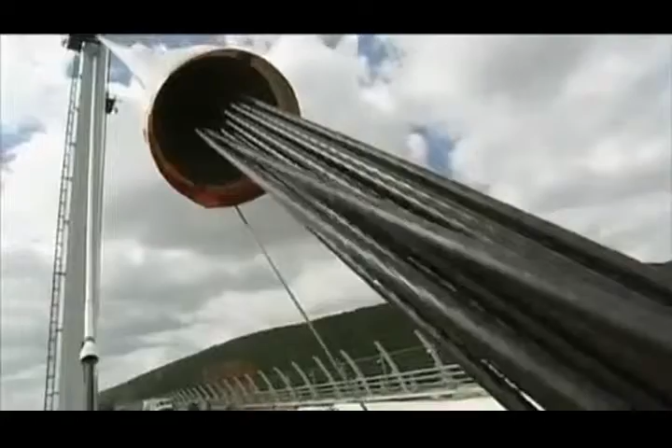With all 7 pylons in place, the team could attach the cable stays that would straighten the rippling deck and give it the strength to cope with full traffic loads. The roadway now weighs over 40,000 tons, and the 154 cable stays should prevent it from sagging or collapsing. The strongest stays are made up of 91 individual steel strands and have a breaking strength of 2,500 tons. Strong enough to hold back 25 jumbo jets, all at full throttle.

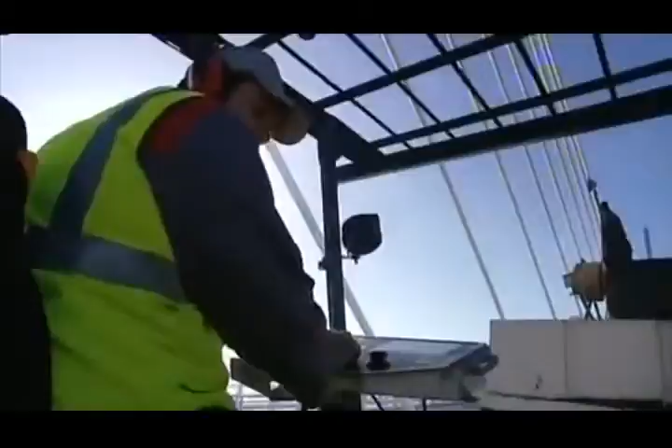As the cable stays are tensioned, true to plan, the ripples in the road deck are pulled straight. Over the 2.5-kilometre deck, the ripples are now no larger than the size of a thumb. They're finally on the home straight. The road surface goes on, adding a further 10,000 tons to the load. But before it could open to the public, the team needed to know the bridge is safe. It would have to pass one crucial test.

After 3 years, the construction team building France's Millau viaduct, the world's tallest bridge, are about to find out if they got their calculations right. On a single-span cable-stay bridge like the Normandy Bridge, a large load on the main section is no problem, because the cables are attached to solid ground and can't give. On the Millau viaduct, with its 8 spans, the cables are attached to the deck of the adjacent sections. A load on one section will cause it to drop, pulling the stays down. As the pylons lean in, the matching stays are pulled upwards, lifting the neighbouring decks and causing a dangerous rippling effect.

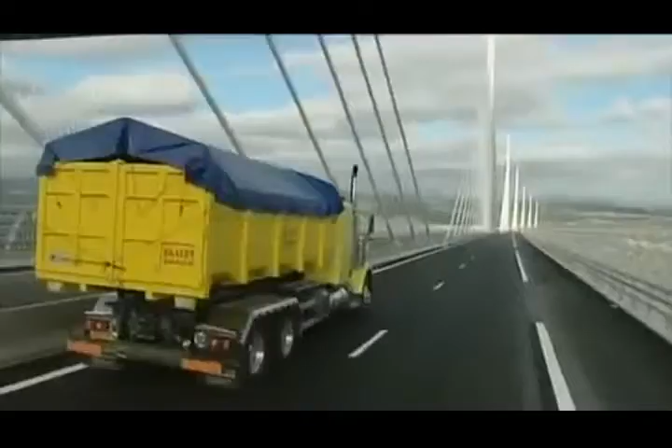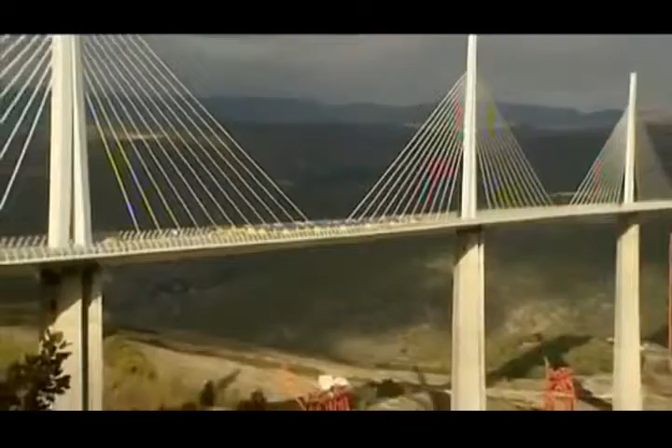It's right now the team put their bridge to the test. These 28 trucks have a combined weight of over 900 tons. They are now positioned in the critical point, mid-span. The engineers hold their breath. Measurements are taken. The span bends just 26 centimeters. This is a triumph for the engineers. The bridge was designed to cope with more than double that.

4 weeks later, on December the 14th, 2004, President Jacques Chirac officially opened the Millau Bridge. A proud moment for the whole of France. Just over 3 years of construction have produced the tallest bridge in the world, designed to last at least 120 years. And against the odds, the project manager even brought the job in on time. But that's not what he's most proud about. What I remember, because on construction sites there are often accidents, is that we had no serious accidents, nothing more than a minor injury.

As soon as it opened to the public, the bridge was an instant success. But the real test isn't till its first summer, and the French all take their annual vacation. No one ever expected anything like this. Numbers peaked at more than 50,000 vehicles a day. At over $7 per car, that's great news for the construction company, who are clawing back their $478 million investment in the project.

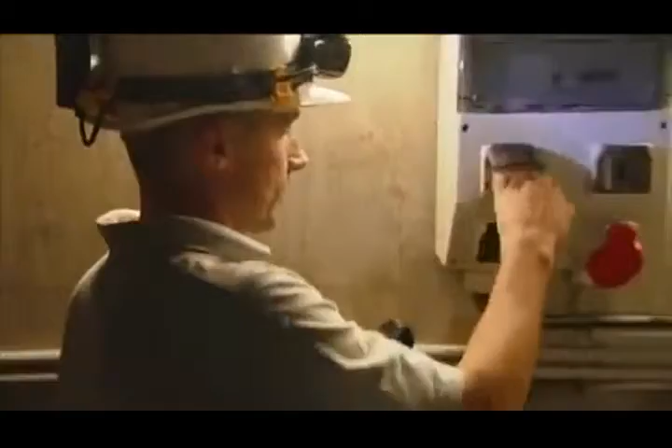This was an epic bridge to build, but it's just as epic to maintain. Thierry and Frank are assigned to P2, the world's tallest bridge pier. This structure is no solid concrete block. It's a series of vast hollow spaces. Their job today is to test the communication system and electric circuits on each of the 7 structural floors. This involves a 343-meter climb, going hand over hand up a ladder for the rest of the day. By dusk, when Thierry finally reaches the summit of the pylon, he may be exhausted, but there is a payoff. You get a fantastic view from here, a 360-degree panorama.

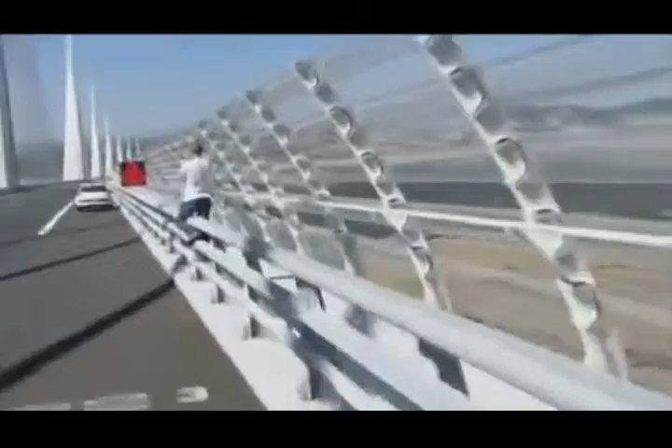The tallest bridge in the world has become an icon. But this is creating problems no one had ever imagined. Locals have been taking over the bridge as a platform to get media attention for their causes. This crowd was hoping that driving sheep over this freeway in the sky would help them get more farming subsidies. When it's not sheep, it's people stopping dangerously, trying to get a unique souvenir of this unique structure. This reckless photographer soon moved on his way, but it's a continuing problem.

You could say the Millau Bridge is a victim of its own success. It's definitely become a major tourist destination. 700,000 visitors in the first 9 months. Fortunately, most of them wait till they're off the bridge to take their photos. It's magnificent. I came 600 kilometers today to see the Millau Viaduct. There's only one thing to say. It's extraordinary. They're drawn because it's a world-beating structure, but also because it's incredibly beautiful, delicate and minimal. Not what you'd expect from a structure that's nearly a third taller than any other bridge on the planet.

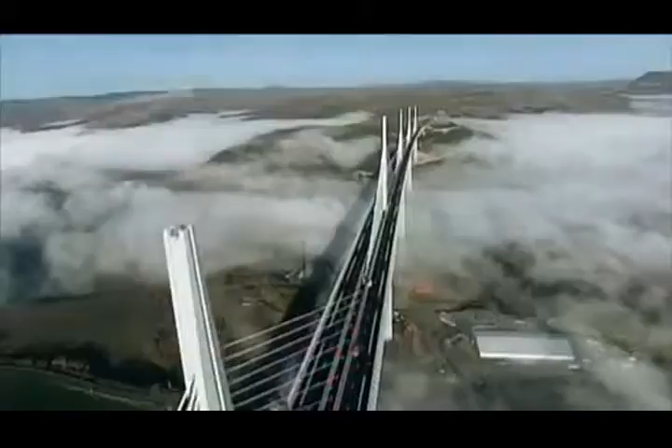And architect Lord Norman Foster's achieved his aim to give the driver the sensation of soaring. As you leave these plateaus, you do fly. You fly across this bridge. Literally, you are above the clouds. And the result certainly pleases the man who dreamt it all up. To see erected this bridge, which I imagined 15 years ago, it's something magic. This is the longest pure cable stay bridge in the world, the tallest roadway in the world, and of course at 343 meters, it is the tallest bridge ever constructed.